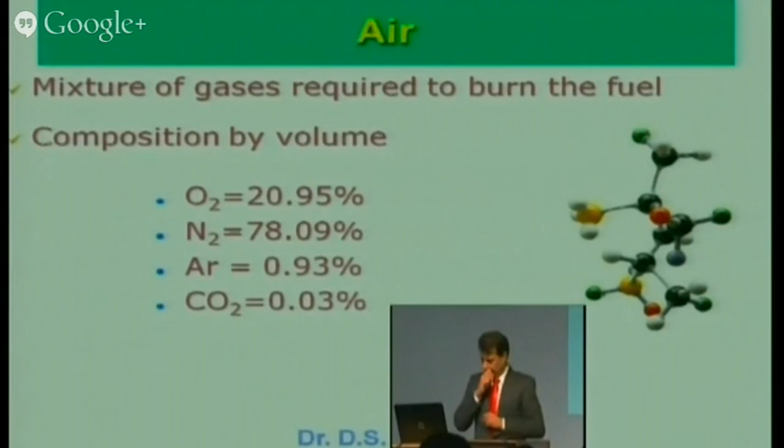And this air combined with the hydrocarbon, we have to understand whether it is petrol, either it is diesel, either it is CNG. CNG is very easy, a very simple gas. The composition is like 80% methane, and methane, if I go by the chemical formula, it is CH4. It means any fuel, either petrol, diesel, biodiesel, LPG, or CNG, is a composition of hydrocarbons, meaning carbon and hydrogen atoms.

And what we are taking also, carbohydrate. When these carbohydrates are burning, they are bound to produce CO2. Similarly, as I exhale, if I take the composition, CO2 is more. Similarly, when the engine is giving the exhaust gases, there is CO2 in that. But CO2 will be there if complete combustion has taken place. If there is incomplete combustion, then there may be CO formation also, and there may be unburnt hydrocarbons also. That we will discuss in the subsequent slides.

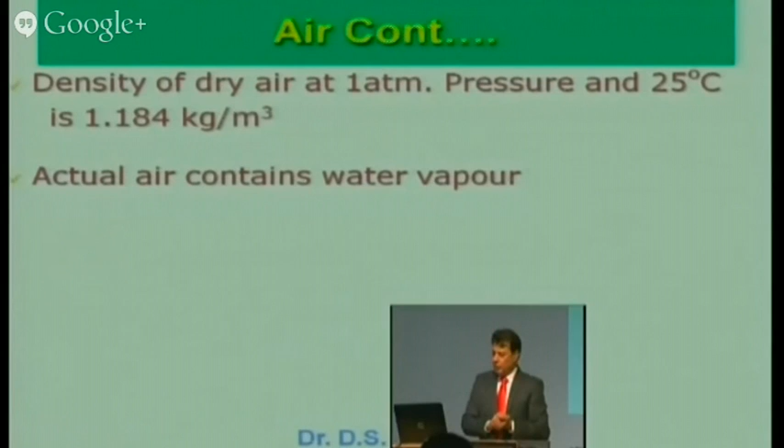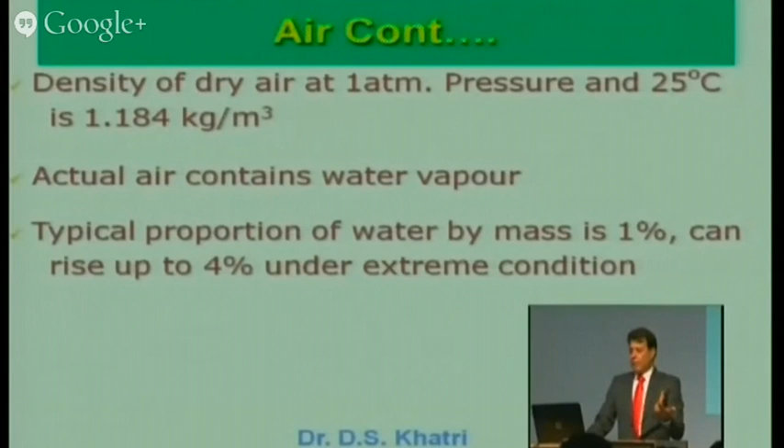So density we are using around 1.18 kilogram per cubic meter. Some vapors are also there, but those at this moment we are not considering.

Now next what is there? Air is fundamental. Next we are talking about hydrocarbons and we call it fuel. So any fuel, any substance, any chemical composition which can be converted from its chemical energy into heat energy, we can use as fuel. Do you know the first engine which was tried used coal?

Not steam engine, even in compression ignition engines, the coal was powdered very finely and that was injected into the engine. Because at that time petrol and diesel were not known. And if you go back, earlier we were using solid fuels.

There are three categories of fuels: solid fuels, that is coal and wood. Then we felt it is giving a lot of smoke, lot of pollution and lot of waste, because when you burn coal, there is a lot of ash.

Then they thought how we can clean the environment, and then came liquid fuels: petrol, diesel, kerosene. These are the category of liquid fuel. Definitely, as compared to wood and coal, liquid burning is more clean.

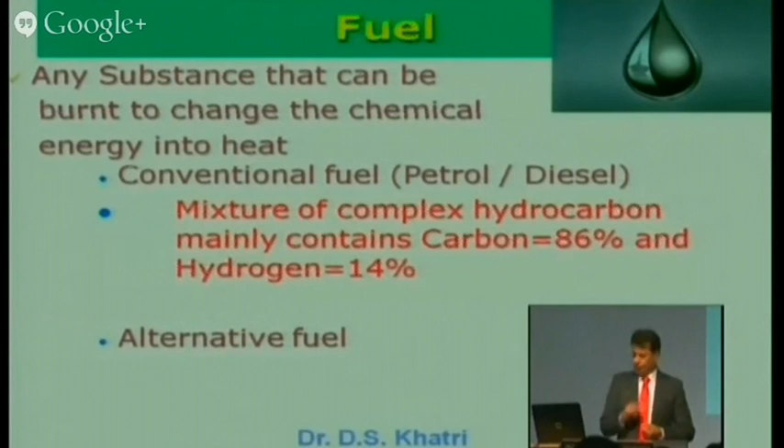But to reduce pollution, to clean the environment, some unconventional fuels are also being used, and one of those is CNG, compressed natural gas. The chemical composition of CNG is more than 80% methane, CH4.

Now, very important aspect. If you want to be healthy, if you want to optimize yourself properly, suppose every day you are taking 3 chapati and some salad, and if I ask you to take 10 chapati, will you get more power? No.

Even your system may have some problem. You may get some problem. If I ask you to take half a chapati, again you may have some problem. The important aspect in engineering, and even in human health, is what is the appropriate quantity which you should take. It is easy to take less, it is easy to take more, but the appropriate quantity is hard because you don't know what is appropriate.

Similarly, air fuel ratio will tell you, for a given amount of air, how much fuel is required. If you give less than that, it may cause a problem, and we have to understand what type of problem it will cause. If you give more, again it will cause a problem. Like in a human body, if I am taking too much food, I have a problem. If I am taking too little food, again it may be a problem. So appropriate quantity, appropriate food, appropriate fuel is a design parameter which is very basic to get the maximum output from the engine, maximum output from your body, maximum efficiency of your body, maximum efficiency from the engine, with minimum pollution.

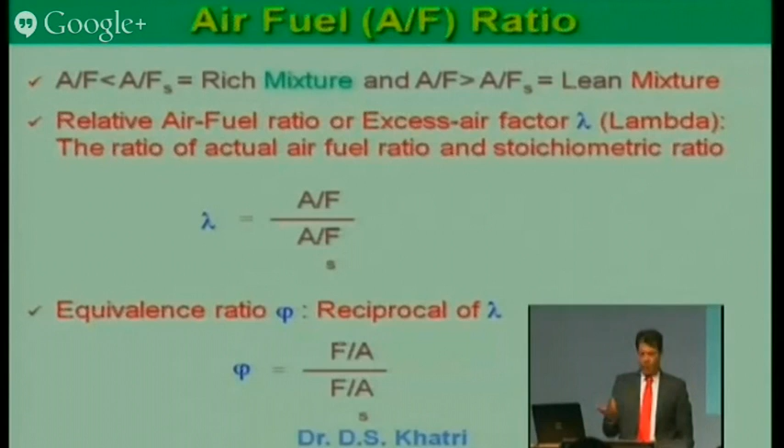The lambda value may be 1.1, say 1.01, or whatever it may be. And if the actual air fuel ratio is less, it needs 14.7 but it is 13, so it will be 13 divided by 14.7, which will be less than 1. So either the value will be more than 1, or less than 1, or equal to 1. If it is 1, we call it stoichiometric. And 1 by lambda is equal to equivalence ratio, which is the reciprocal of lambda. We call it fuel air ratio divided by fuel air ratio, but anyone will do for you.

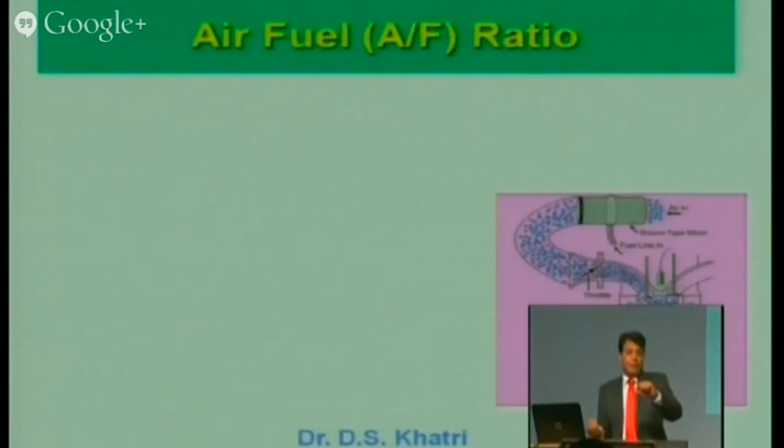Now all struggle is going on how to control the air and fuel ratio. This is one aspect of the mixture preparation. Suppose I am taking 50 cc of air, how much fuel do I give? If I am to give 3 cc of fuel, how do I give exactly 3 cc - neither 3.1 nor 2.9? How to make sure, especially because the engine is varying in speed and load conditions? As the condition changes, I have to change the quantity of fuel also, because air will change. In running condition, air is going high, low, high, low, and the fuel has to match with that requirement. If I am able to do this with 100% efficiency, it will be good. If I am not able to do it, your fuel economy will be poor, your pollution will be more, and waste of energy will be more.

So now I think three things are clear: stoichiometric air fuel ratio, where lambda is 1; rich air fuel ratio, where lambda is less than 1; and lean, where it is more than 1.

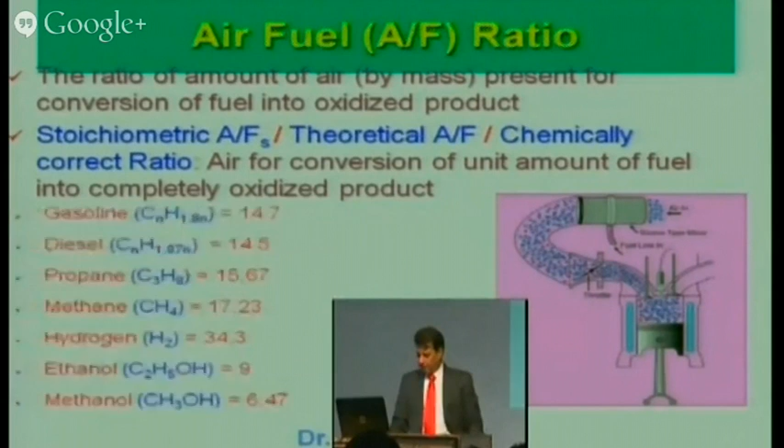Now I am giving some air fuel ratios of different fuels here. For petrol, it is around 14.7. For diesel, it is 14.5. For propane, it is 15.6. For methane, that is CNG, it is 17.2.

For hydrogen, a wonderful fuel - why is it wonderful? It does not have a carbon content, only hydrogen, so you will not produce CO2. There is no carbon, so that is a fuel of the future. Even in aircraft, you are using some of this concept, but that can be used only up to a certain level. For oxidation you need oxygen, but where is the oxygen? So either there is a carrier of oxygen in a cylinder we have to carry - one cylinder of hydrogen, one cylinder of oxygen, because air is not available there - this is for space application.

Secondly, hydrogen has a very high calorific value - it is 3 times more than petrol and diesel. 1 kg of hydrogen has around 120 megajoules of energy, whereas 1 kg of petrol has only 42 megajoules of energy. So energy content is more. We are also using ethanol and methanol.

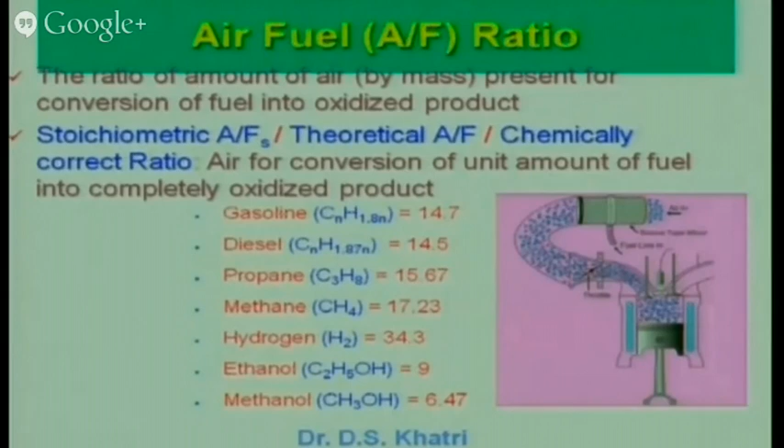Now why is it so important? We should understand why it is so important to control the air fuel ratio - why are we talking about this so much? If it is lean, what happens? What happens if it is rich? What happens if it is stoichiometric? I should know and understand that.

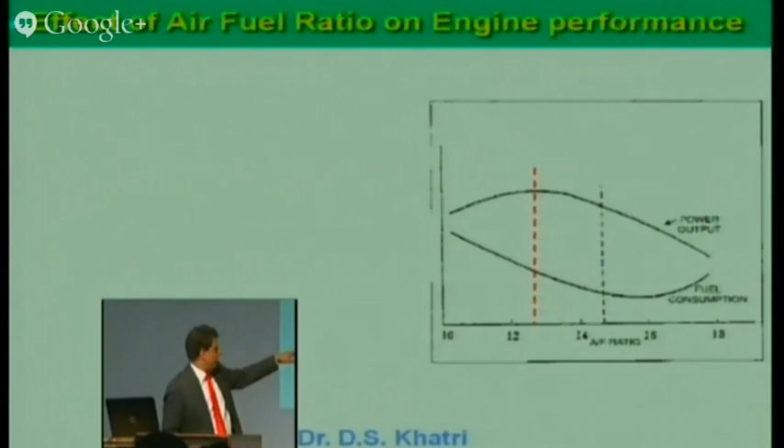Now these are two curves. One is indicating the power output of the engine - the upper curve is power output, and the bottom curve gives the specific fuel consumption. If you look at where the maximum power is, around 12.4, it means the mixture is rich there. If I use the same mixture, my fuel consumption is higher, but I want fuel consumption to be low. If I make it lean, at stoichiometric air fuel ratio around 14.7, the fuel consumption reduces, but it is not at the minimum level. Minimum fuel consumption I get around 16:1.

But if I use 16:1, I get very good fuel economy, but I am not getting the power - and that is a challenge. That's why the engine management system comes into picture to manage all this. Now I have shown you one slide only about power and fuel consumption. What about emissions? Emissions is also a challenging task - I have to reduce the emissions also. Now we can see the effect on emissions also.

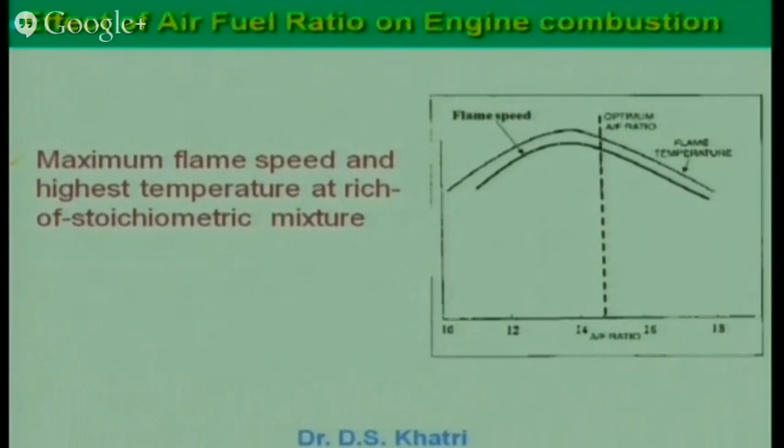To understand the emissions, let me make clear the fundamentals of combustion. Why am I trying to get the stoichiometric ratio, what happens? Because ultimately I am burning the fuel - what happens to the burning rate? The dark line, bottom line, is the flame speed - the flame produced in the petrol with which combustion can take place. Maximum flame speed is around a rich mixture, meaning petrol can burn very quickly when the mixture is slightly rich.

If you make it 10, that's not good. If you make it 18, that's also not good from a combustion point of view. So flame speed is maximum around 13.8 air fuel ratio - there your combustion is very fast. It's like taking some tonic - 10% tonic will do, but if you take 50% tonic, it will not do. So with the engine also, a little tonic, a little extra fuel, will make your combustion better and make your power better. Clear?

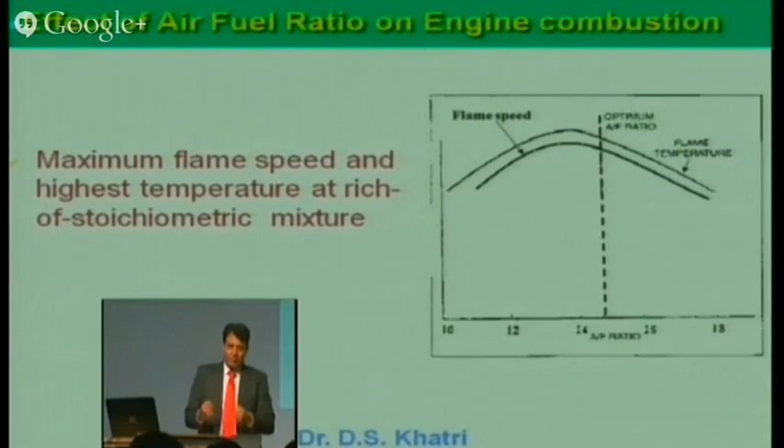Now, this is all three. What is the challenge to me? If I want to get very good combustion, I need a different air fuel ratio. If I want maximum power, I need a different air fuel ratio. If I want maximum fuel economy, I need a different air fuel ratio, and they are contradicting each other. So as an engineer, as a scientist, as a technical expert, what should I do? Whether I should operate at the upper one, middle one, or lower one.

That is a challenge. Now we have made clear the basic three things. Let's come to the emissions. There are CO, HC, and NOx emissions. Now if you look at the NOx emission, NOx is maximum, it is a bell shape. NOx is maximum when lambda is 1, or air fuel ratio is 14:1, 14.7.

If I am operating very close to stoichiometric, NOx emission will be very high. That is a problem. For hydrocarbon, if you see, as I make the mixture rich, hydrocarbon emissions go up. If I am making it lean also, again it goes up. So to reduce hydrocarbon emissions, I have to operate around 14.8 or 14.9. But if I am operating there, NOx is maximum.

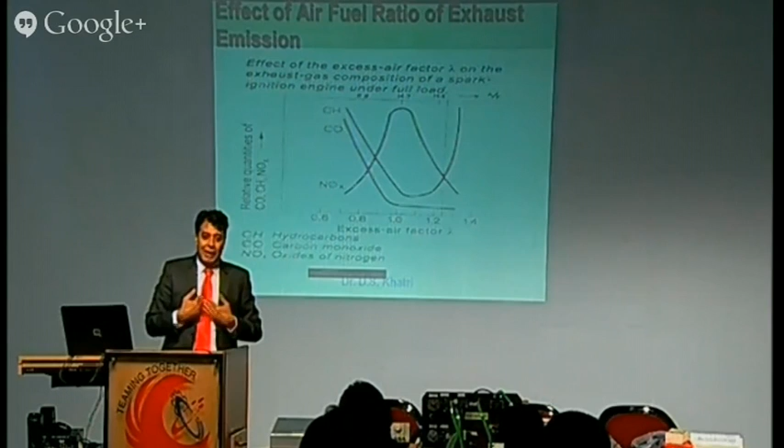What should I do? Because I have to regulate both. Emissions regulations say NOx should be low, and hydrocarbon emissions should also be low.

Let's come to the third, CO emissions. If I am using a rich mixture, CO is very high. So if I want to increase power, hydrocarbon will go up slightly, CO will go up. If I am making it lean, power will reduce, but hydrocarbon will increase, fuel economy will improve, and CO will reduce. So from this trend, lean mixture is good for CO reduction.

Why it is good, we will cover tomorrow in the combustion study. To reduce hydrocarbon emissions, I can operate the engine very close to stoichiometric, around 14.7, 15, in that range. But there, NOx is very high.

If I want to reduce NOx, either I can operate rich or lean. So it means for CO it is a different issue, for HC it is a different air fuel ratio requirement, and for NOx it is different. Now I have 5 or 6 parameters. I want power, I want fuel economy. Air fuel ratio requirement for power is different, for fuel economy is different, for CO it is different, for hydrocarbon it is different, and for NOx it is different. So there are 5 things which I have to control, and all 5 require a different air fuel ratio. So how to manage all these things?

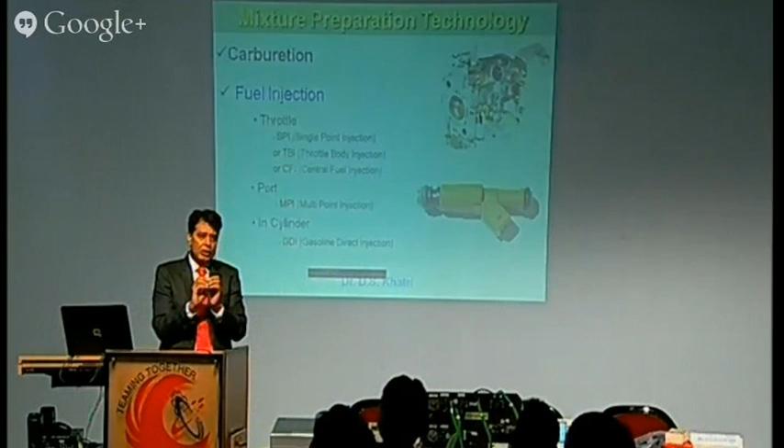So we are going to talk about this in this series. Earlier, to meet the air fuel ratio requirement, we were using a carburetor. You know carburetor? The first engine, when it was designed in 1900, used the carburetor. Since then, there were a lot of modifications done in the carburetor. If air is 1 kilogram, how much fuel is to be given, that was controlled by the carburetor. So carburetor is a device which was metering the air and mixing the appropriate quantity of fuel into the air.

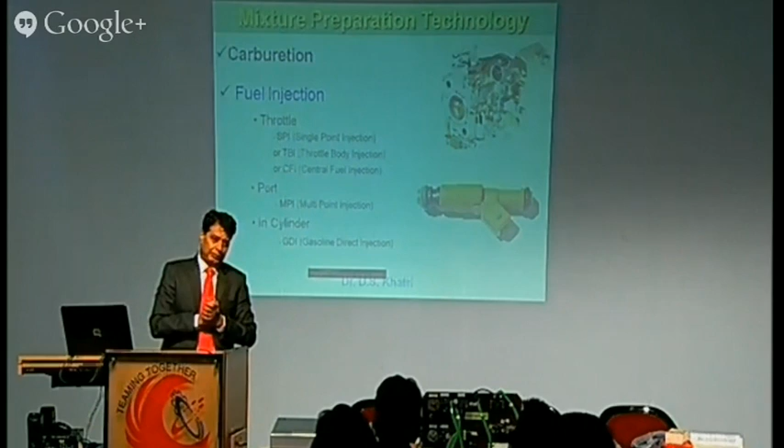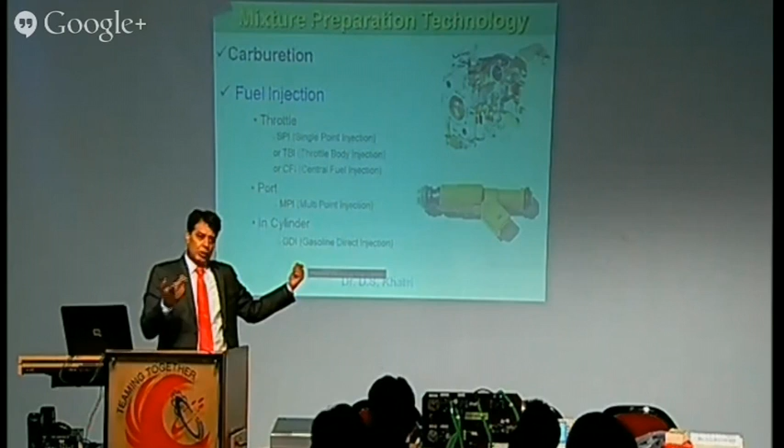Even today, most motorcycle engines work with a carburetor. But today no car uses a carburetor. Carburetor became obsolete in 2000 because it was not able to meet the emissions. It was not able to reduce emissions beyond Euro 2. Up to Euro 1 it was good, it could meet Euro 1 or Bharat Stage 1. But then they said, reduce CO further, reduce HC further, reduce NOx further, and the carburetor was not able to meet that. Why was it not able to do this? Because the carburetor was not able to control the air fuel ratio very accurately or precisely. And hence a system like electronic fuel injection was introduced.

And today we will talk about this system.

In fuel injection system, there are different types of options available. We have single point injection system where we use only one injector. We have throttle body injection system, where we are injecting in the throttle body itself. We are using central fuel injection, CFI. We are using port MPI, multi-point injection system. Suppose there is a 3-cylinder engine, so in every cylinder we are using one injector to inject the fuel.

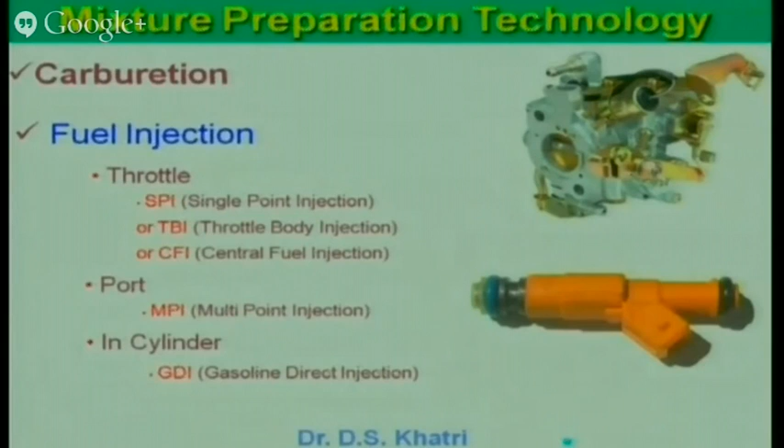Then GDI, it is a new concept. In India, there is no car which is using GDI, but some cars have tried it. It is a gasoline direct injection system. Here the injector is mounted directly into the combustion chamber.

It is more complicated, and we will touch upon this, but today our focus will be to understand the fundamentals of mixture preparation. One part is carburetion. I gave you a little background on what a carburetor is, and why the carburetor is obsoleted and why we introduced fuel injection technology.

Just because it is history, we should know our parents', our grandparents' names. It is like that. So in technology also we should know what was there and how it was improved.

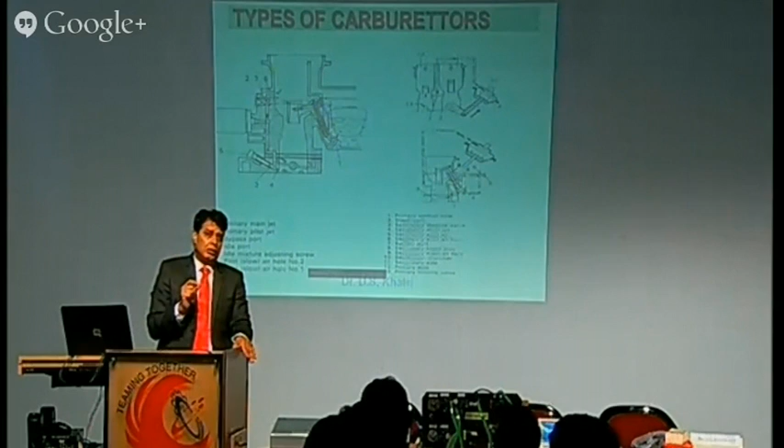Earlier we were using a single barrel carburetor. There was one passage only from where air was coming and fuel was injected there. The problem is the engine is working, or is bound to work, under a wide range of speed and load.

When you start the engine, it is known as idling. It is running at 900 RPM. When you accelerate, put first gear, you are accelerating maybe to 1200, maybe 2000. Change the gear. If you are on the highway running at 90 km/h speed, the engine speed may be 4000 RPM. Load is varying, engine speed is varying. So that one barrel only was not able to meet the varying requirement of the engine's air and fuel.

Then they thought we can use a double barrel. Like this, two ports have been added. That gives a little better performance, but again it was not optimized.

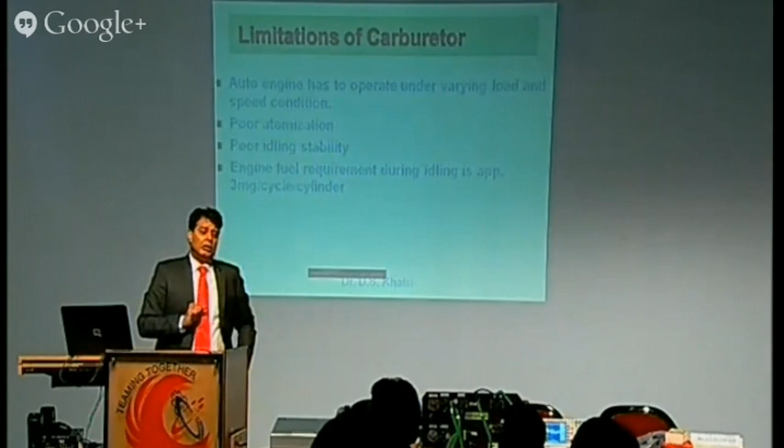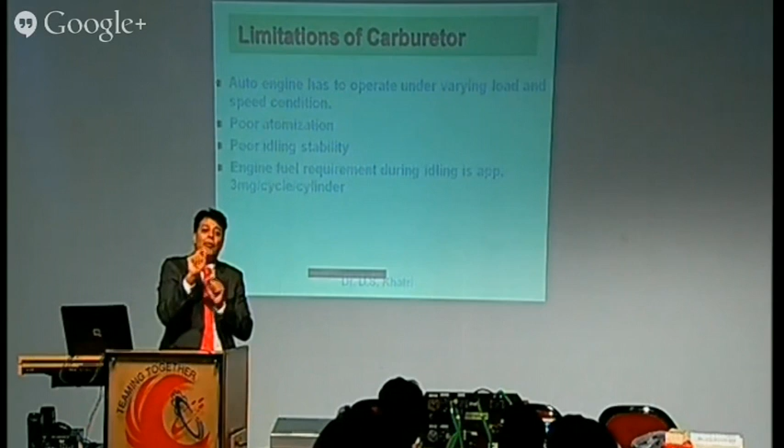Why was it not able to meet the requirement? Because there is a fixed jet which is giving the petrol. The fixed jet can give a fixed amount of fuel at that particular speed. It cannot vary. The jet size is fixed once you put it in the carburetor. The jet size may be 1 mm, or 1.2 mm. That may be good at 2000 RPM, but that may not be good at 4000 RPM. So I cannot meet the requirement under all conditions.

Now second, more important thing is when you start the engine in the morning, because carburetor is using a pressure delta P - the difference between atmospheric pressure and the pressure in the carburetor at the throttle, where this venturi is. Here pressure drops and fuel comes from this to the venturi.

Here the pressure difference delta P is very low. So when you are starting the engine, the fuel atomization is poor, because the fuel is liquid here. When it is coming here, it is coming in drops. If the drop is very fine, very fine in diameter, it will mix in the air very well.

Like if you have a big cube of sugar, it is difficult to mix in the milk or water. But if you have very fine powder, you can mix it quickly.

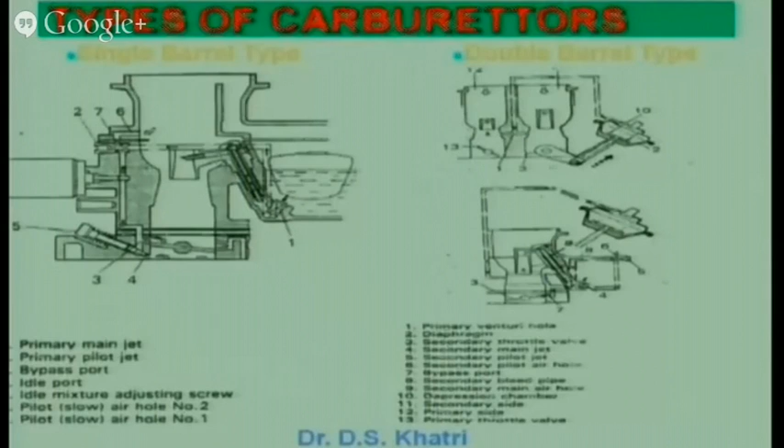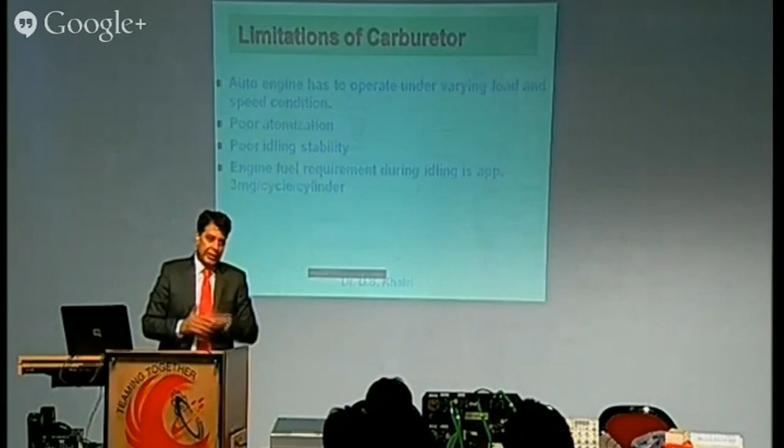So this problem is more prone at low speed. At high speed, the speed is very high, so if you mix, it can mix up. But at low speed, it is not mixing. So that was one problem with the carburetor - poor atomization, we can call it technically. Due to poor atomization, idling was unstable.

Engine, suppose you want to fix 900 RPM, so sometimes it is going 950, sometimes 850, sometimes 1000. You are not changing anything, but still the engine is changing its speed because of this behavior, which is not good from a fuel economy point of view, neither is it good for efficiency, nor from an emissions point of view.

Now another important thing - I am giving a figure per cycle per cylinder. Typical 800cc, like this is the example of a Maruti 800cc car or Alto 800cc, that needs only 3 milligram of fuel per cycle per cylinder. To meter 3 milligram, it becomes 2.9 or 3.1.

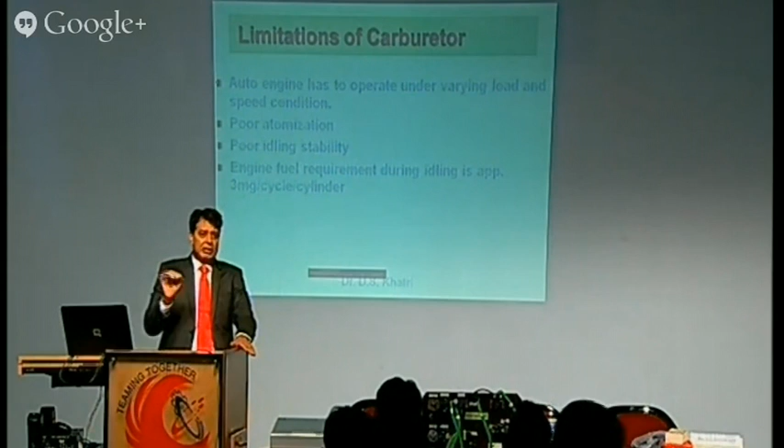Your stoichiometric equation has changed. Your air fuel ratio has changed drastically. So I have calculated, okay, I have a carburetor, please give me 3 milligram. But the carburetor sometimes gives 2.8, sometimes gives 3.2, sometimes it may give 3 also, but it is not giving a constant amount. So my efficiency, my pollution is going in a different direction.

Carburetor works on a speed-up basis. If speed is increasing, more air is coming in, and more fuel will come, which is met by the carburetor. But the problem is that the size of the jet is the same, so it may increase, but it may not increase appropriately, as required by the engine. That is the problem, there is a little bit of lag in that.

Now another thing, if there is one carburetor and I have a 3-cylinder engine, the same fuel is going through the intake manifold, so we call it mixture distribution. The fuel going through, because the carburetor is in the center, and there are 3 cylinders - one here, one here, one here - the fuel travels to each. In the center it has a shorter path, and for the others a longer path. Even if you give the same quantity of fuel, when reaching the combustion chamber it may be different because the traveling distance is different. It may also stick on the walls of the intake manifold. So mixture distribution is not uniform.

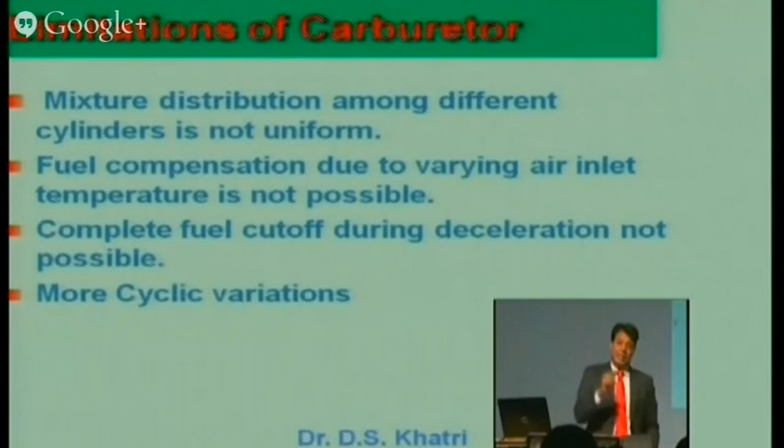But I don't need fuel at that time. It may be possible I am applying the brake also, but fuel is still going. So this concept is known as fuel cut-off - since I don't need fuel, I say cut off the fuel supply during this period from the carburetor. That is very difficult and even not precisely possible, that is again a limitation of the carburetor. In an injection system I can do it, because I will give the command to the ECU, I will develop a control strategy - when deceleration is there, you cut off the fuel, I cut off the injector. There is no supply to the injector, so the injector will close, it will not open, no supply. And I can even make a strategy for when I need the fuel again - suppose I need it at 30 km/h speed, again I want to accelerate, it will start automatically.

So I think now you are better acquainted with why the air-fuel ratio has a significant impact on power, fuel consumption, and engine combustion characteristics like flame speed, flame temperature, combustion pressures, and emissions. So with this you can realize there is a need to control the air-fuel ratio very accurately, very precisely.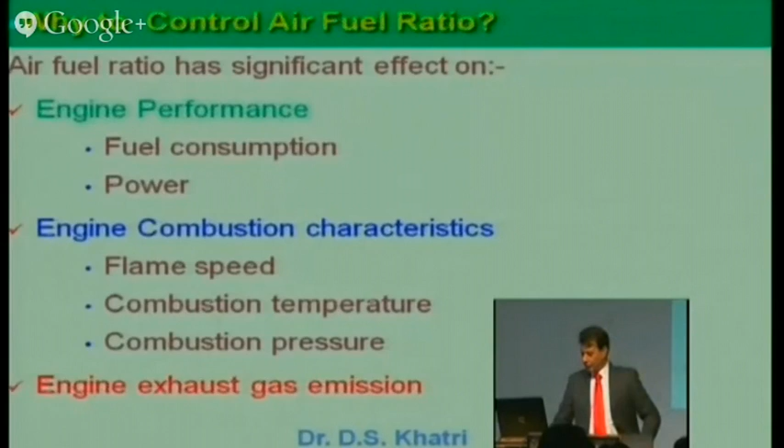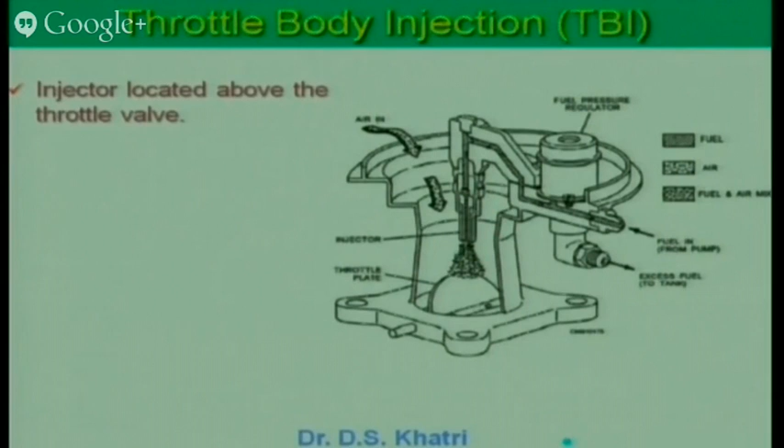This is a very simple throttle body injection system. In this there is a throttle body, and instead of a carburetor I am using an injector. This injector is mounted in the central part of the throttle body, where you can see the spray taking place in the throttle body itself. So the injector is located just above the throttle valve in the throttle body. This system operates at low pressure, around 1 bar, therefore fuel metering is at lower cost due to an inexpensive fuel pump - actually in this system we don't require a fuel pump. The pressure difference is what I have used - instead of that jet, I have replaced it with an injector, which is controlled by the current.

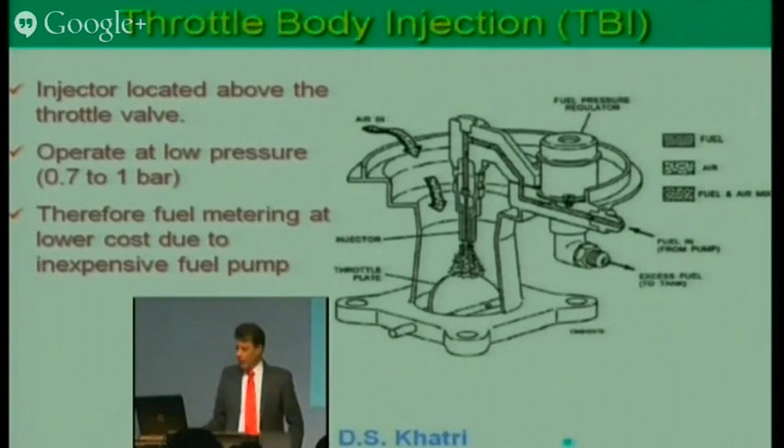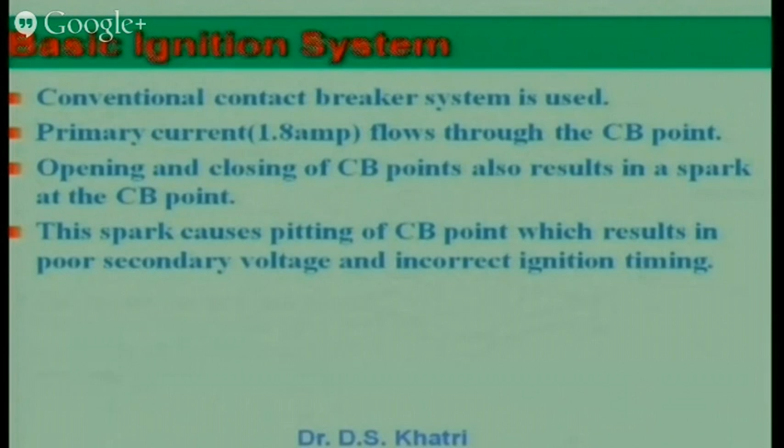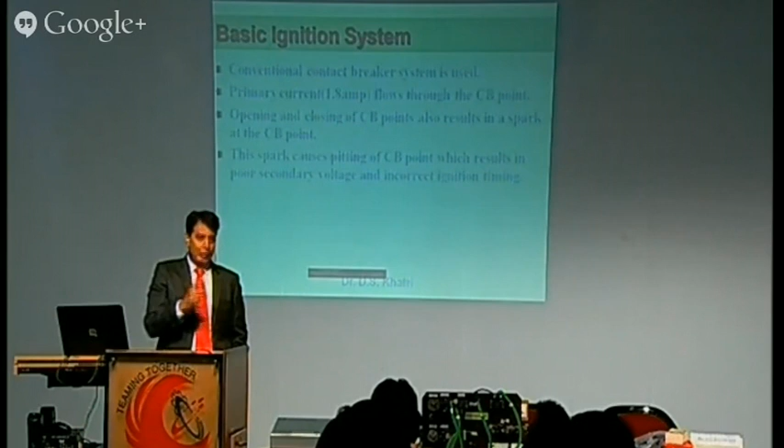Now we have covered one part, fuel. Now, only if I am giving the fuel, how to start the combustion, that is another part. It means I have to create a spark at the appropriate time. How to do that, when to do that, what should be the duration, and what should be the energy of the spark so that it can create the combustion.

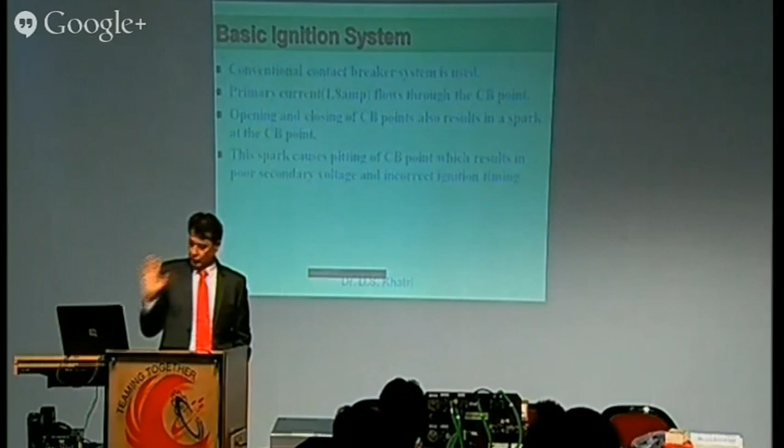Earlier the system, what we call the contact breaker type, there the limitation is that we have the mechanical breaker point and the current is passing through that. There was an ignition coil. When it is opening, the secondary voltage is produced, that is around 15,000 volts, because the ignition coil is like a transformer. There is a primary winding and a secondary winding, but that interruption is done by the mechanical breaker point. That's why if you go for tuning, they set the mechanical point, and when it is opening, a little spark is created.

So to avoid that damage, we are limited. We cannot increase the primary current. Hence our secondary voltage produced is always not what we want, it is less. So that was the limitation of the mechanical type of basic ignition system.

And to burn the fuel properly and completely, we need an appropriate amount of ignition energy. Secondly, that mechanical point, after 10,000 to 20,000 km of running, pitting starts and the performance further reduces. So the secondary voltage production is reduced, the output is not sustainable or stable over the period of time. That was the problem of the ignition system.

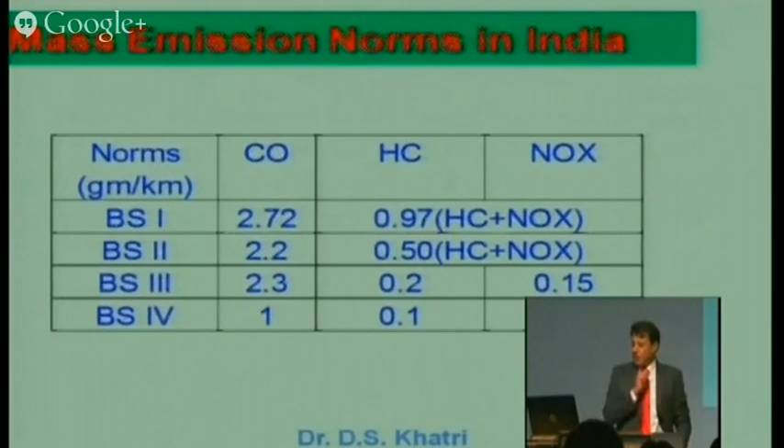Now why all this has been done - if you look at emissions, just to give a background: Bharat stage 1, we call it BS1 or Euro 1, CO was 2.72 gram per kilometer. Euro 2 was reduced to 2.2, and in BS4 it is 1. Similarly, HC is reduced and NOx is also reduced. So this pressure on emissions reduction, a carburetor cannot handle. That's why we need the engine management system.

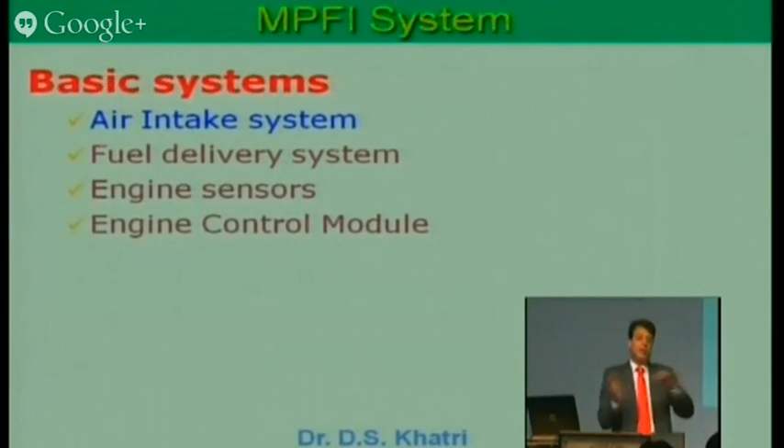Now I will start the engine management system. This system can be categorized into 4 parts: air intake system, where air is coming; fuel delivery system, where fuel is coming; different sensors; and the engine control module, that is the ECU. Now look at the air intake system.

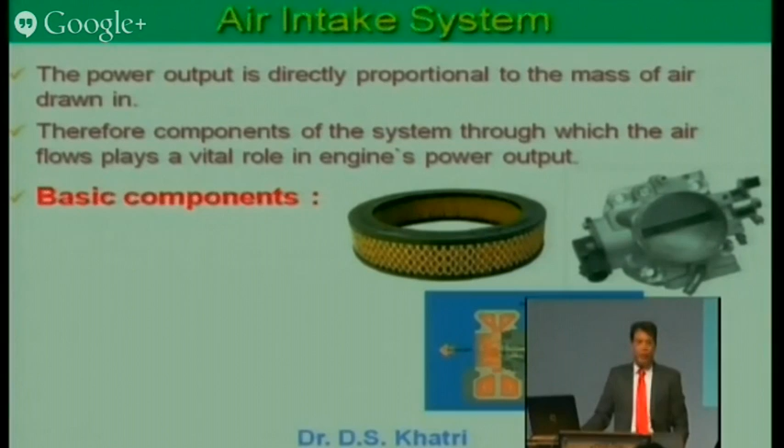You can understand it is like a nose, I am inhaling from here. Even in our nose, there is a filter system working, which will hold all the dust of the air - there are small fibers inside the nose that remove that dust. Here we are using an air cleaner, which cleans the air before going to the engine, so we call it an air filter. Then from the air filter, the air passes through the throttle body.

And if the engine is supercharged or turbocharged, then it will pass through that also, otherwise it is going directly to the engine. So the intake system comprises the air filter and throttle body.

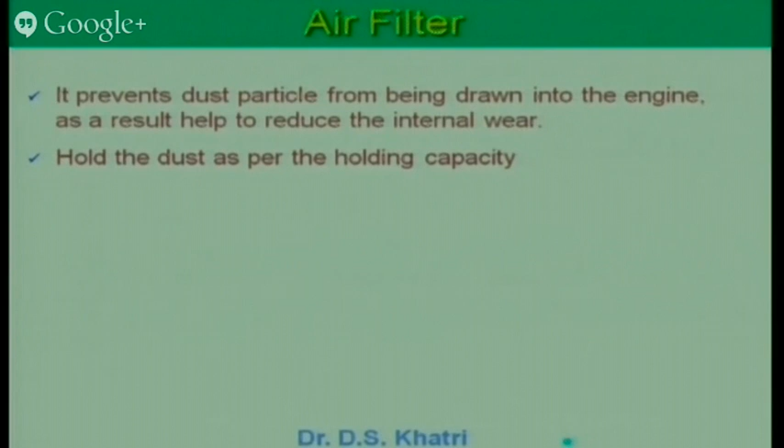Now why do we want to use an air filter? So that if dirty air goes in, it will damage the engine - the wear and tear will be very high and the engine will seize. It will also damp the noise - if you remove the air cleaner, noise will increase. That is another benefit.

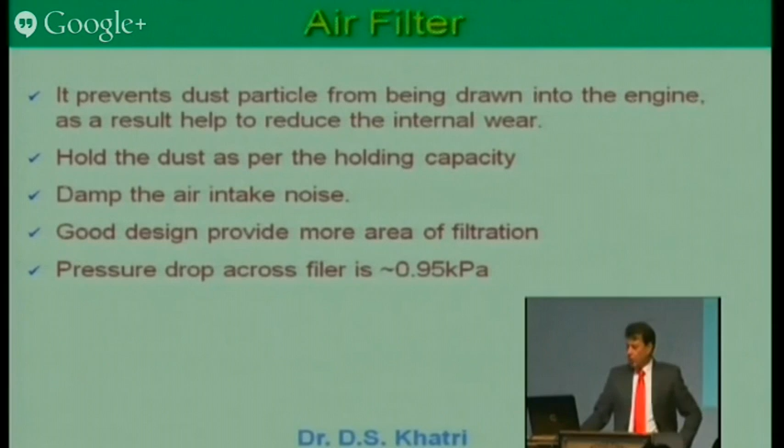But if I am using an air cleaner, I have to clean it after some time because dirt will be there. So when should I clean it, how much dust it can hold - that is a design parameter we call dust holding capacity, how much dust it can absorb. In a new filter, the pressure drop - because whenever we put any filter there will be a pressure drop across it - is around 1 kilopascal. And filtration efficiency is generally kept more than 98%, so most of the dirt should be removed.

Now there are different types of designs: side mounted, central mounted, paper type of filter - we use filter papers to clean the air. And you have seen some oil bath type filters also. Oil bath type filters are used in buses and trucks where the dirt amount is very high, and in tractors also. Paper type filters are used in motorcycles and passenger cars.

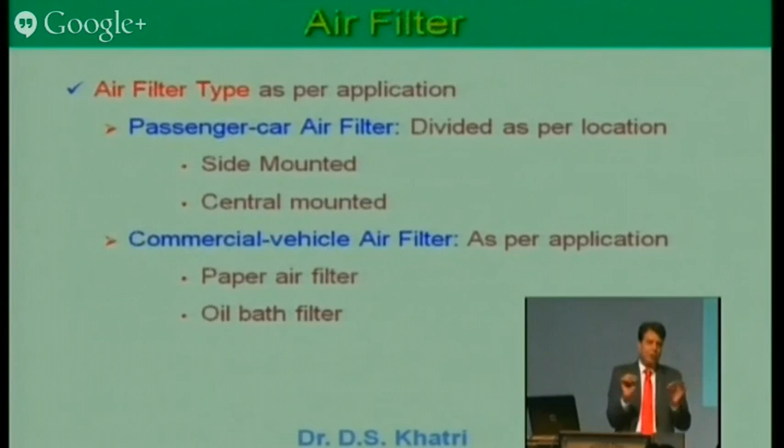Now come to the throttle body. The throttle body actually controls the amount of air. Your accelerator pedal, when you are accelerating, the amount of air is controlled by the throttle. You can see that valve. Air is coming from the air cleaner side, then it is going to the engine. So this is the valve.

When it opens, more air is allowed. Generally, from your interest point of view, these throttle bodies are made of either aluminium or plastics. So it controls the amount of air.

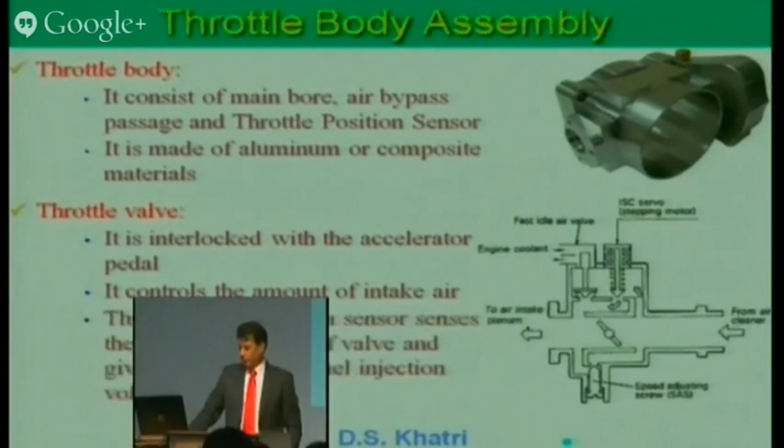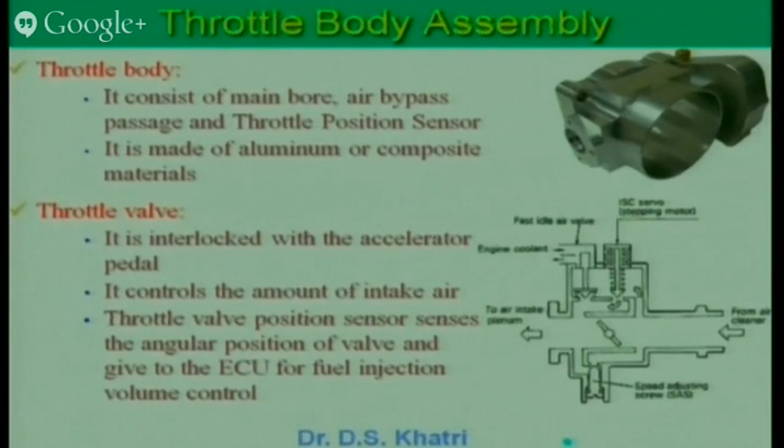On the throttle body, we are mounting the throttle position sensor, which indicates how much the throttle is opened, and it gives that as an input to the ECU. We call it the throttle position sensor.

Now, a very interesting thing. Suppose your car is idling and you have switched on the AC. When you switch on the AC, you are not pressing the pedal, but the load increases. So when load increases, who provides extra air and extra fuel? For that, we put an idle air control valve, which is integrated in the throttle body only, or sometimes it is separate. So whenever there is extra load during idling, that is taken care of by the idle air control system.

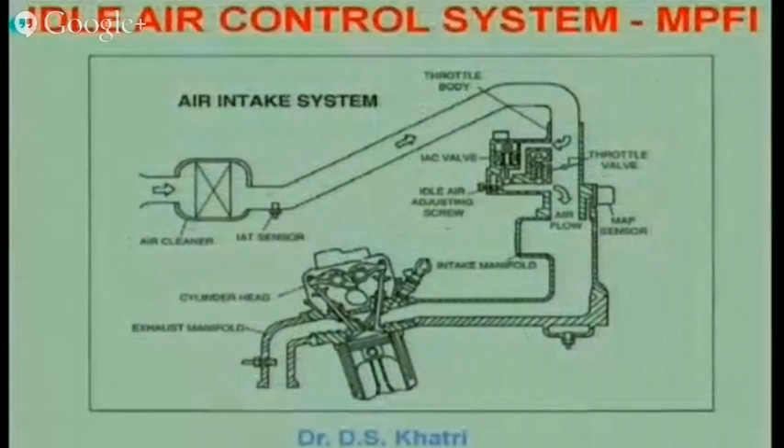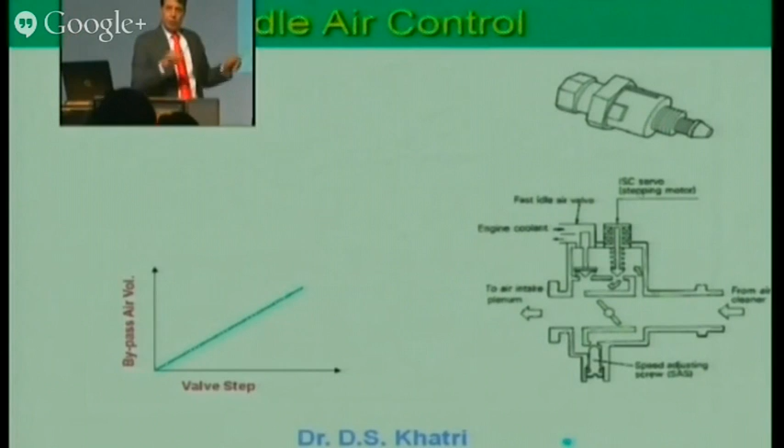This is the idle control valve. So you need more air during idling. In this condition, the throttle is constant, so there is a bypass. If you can see, there is a bypass. The valve will open and allow more or less air from the bypass. This system works through electronics, through the ECU, and that strategy, we have to develop - when to open, how much to open.

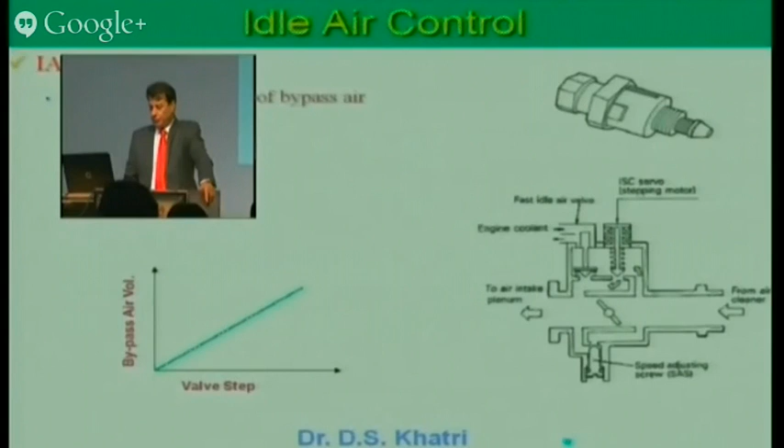For this we can use two types of systems. Either a stepper motor - I give it current, it will open more and more steps - or there is a flap type valve that can also be used. Different companies use different types of valves.

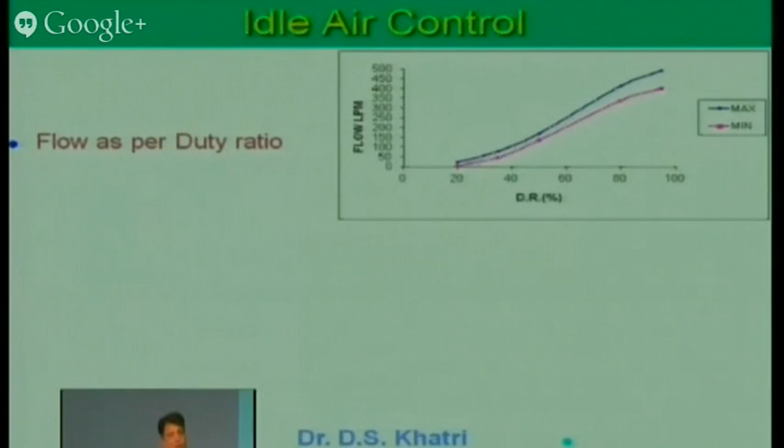This is the duty ratio - how much airflow is required, that is the duty ratio of this idle air control valve. If it opens more, we call it more duty ratio. If the capacity is 100% and it is working at 100% capacity, duty ratio is 100. If it is completely closed, 0 duty ratio. If it is 10%, it means 10% utilization. So it depends how much the engine requires - I may open it 10%, 20%, 30%, depending upon the need of the engine.

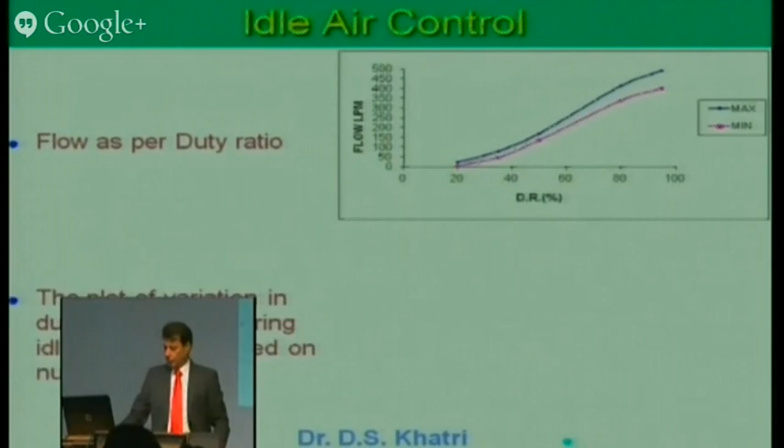Now, the air intake system: so there is an air cleaner, throttle body, and idle speed control valve. Now come to the fuel delivery system.

We have the fuel pump, then we need a fuel filter, like an air filter - we have to clean the fuel. Then we need a fuel pressure regulator, because we want the fuel that goes to the injector to be at constant pressure. If the pressure varies, then the quantity you are injecting will vary.

So here I can give you experimental data. In cars, we use around 2.9 bar of pressure. Like Maruti Alto uses 2.9 kg per centimeter square fuel pressure. So the pressure regulator gives the fuel at a constant pressure of 2.9.

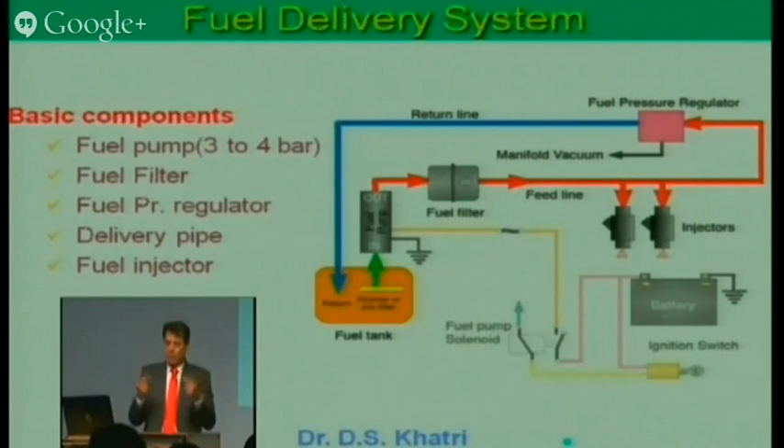So the fuel pump works between 3 to 4 bar, then the pressure is maintained - the fuel filter cleans the fuel, the pressure regulator maintains the pressure of the fuel. Delivery pipe: suppose there are 3 cylinders, I have to mount 3 injectors, so we call that a delivery pipe or fuel rail.

So this is the schematic. Fuel pump - let me explain the fuel pump requirement.

It should be capable of working between -40 to 80 degrees Celsius. Now let me tell you why this is so important. The first car Hyundai launched in India with an injection system was in '99. When this car was launched with the electronic fuel injection system, there were many complaints - the car was standing on the roads, not running. When they analyzed what the problem was, you know what it was?

The problem was - and they were working in Korea, Japan, everywhere - the fuel pump was designed to work at a temperature of maximum up to 50 degrees Celsius. In India, summer is very hot and the temperature of the fuel tank goes above 50 degrees Celsius, because the fuel goes to the engine then comes back as extra fuel. That also increases the heat, and the atmosphere temperature is supposed to be around 46. It means there is no heat exchange, so it will increase further. And if the temperature goes beyond 50, the fuel pump starts malfunctioning - it doesn't work, so fuel doesn't go to the engine and the vehicle stops.

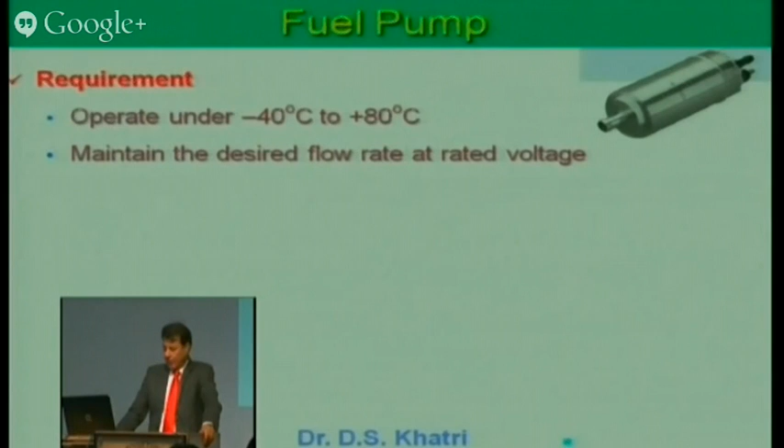Maintain the desired flow rate at rated voltage, and maintain fuel system pressure of 3 to 5 bar.

It should be capable to meet all types of vibrations in the vehicle, because when mounted in the vehicle, the tank is under vibrations. So under vibration it should be capable to deliver.

Now one more important thing I would like to tell you. Do you know where the pump is mounted? Most people, sometimes sitting in a car, might have driven a car. Do you know where this pump is mounted? Inside the...

There, on the engine side, we were mounting the fuel pump of a carbureted system. You are right, the carburetor fuel pumps are mounted near the engine. It is mechanically driven. But this pump is not mounted near the engine.

You see why I am taking this example. This is a very simple thing, right? But sometimes we never think about all these things. We are using a car. Maybe I am a mechanical engineer, an electronic engineer, or even a customer of the car, a user of the car. You know, when we start thinking in a different mode, even thinking is an art. Most people, we don't know how to think.

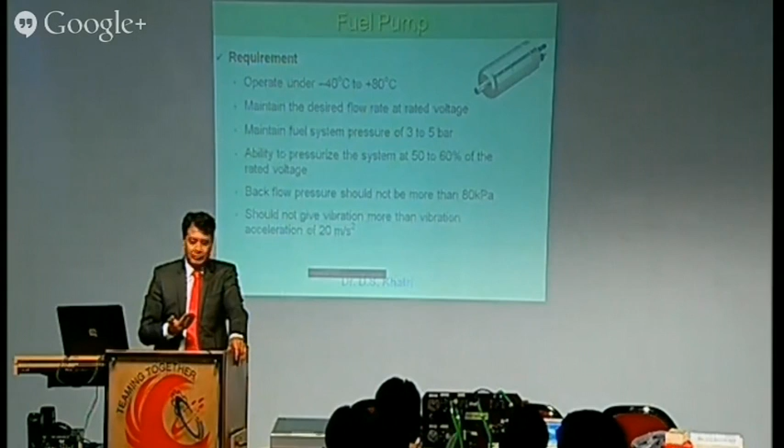So this pump is mounted inside the fuel tank, and there is a very special requirement of this pump. Though the pump is mounted and electrically operated, if any spark is created, it may cause a blast. So one should think, oh, it is very dangerous also.

And suppose, because there will always be some fuel in the fuel tank, it cannot be mounted directly on the floor. There should be some gap, maybe 10 mm or 15 mm, so that it cannot suck the dirt. There is a filter also at the bottom end. If the fuel level is lower than that, the fuel pump is not able to suck that.

That is called dry operation. Even during designing a pump, we have to give the specification. If the car is empty, driver fuel gauge is not working, you don't know how much fuel is, and it stopped running the car. You don't know what is the problem, and suppose there is no fuel. What you will do? You will try to start the car.

When you try to start the car, as you switch on the ignition switch, the pump will work, but there is no fuel. It will start rotating, and at that time spark is created in the armature and rotor, because some fuel is always there in the tank, but the pump is not able to lift that because it is at a very low level.

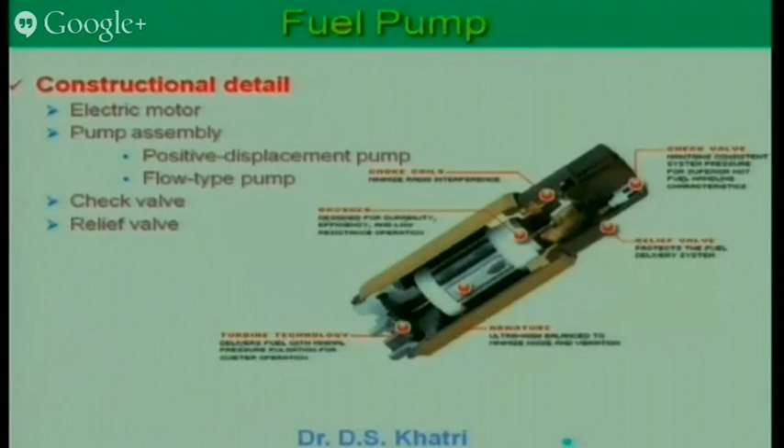This is the internal structure of the pump. It has a motor assembly, and then check valve is there, relief valve is there.

Now coming to the fuel filter, I am just discussing for a few minutes for the fuel filter, but there is a, you can do a lot of PhD on fuel filter. What size of the paper should be there? What should be the pore size? Even a new concept is coming in fuel filter, that is nano fiber.

Now we are using nano fiber to make the fuel filters, where the pressure drop should be minimum. If high quality of fuel you want to make, there should not be any dirt in that, even nanoparticles should not be there. There are plants, there are companies who are working only on fuel filter.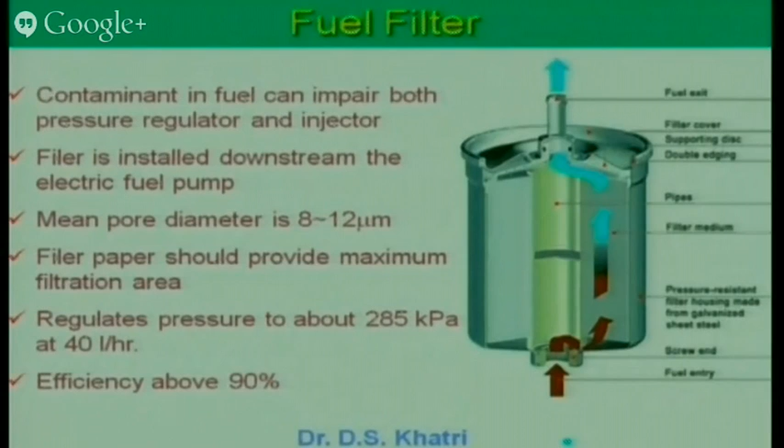So mean pore size is 8 to 12 micron, and flow rate and efficiency of the fuel filter is generally 90%, but now they are demanding more, they say it should be 95, 98. So we have covered fuel filter and fuel pump.

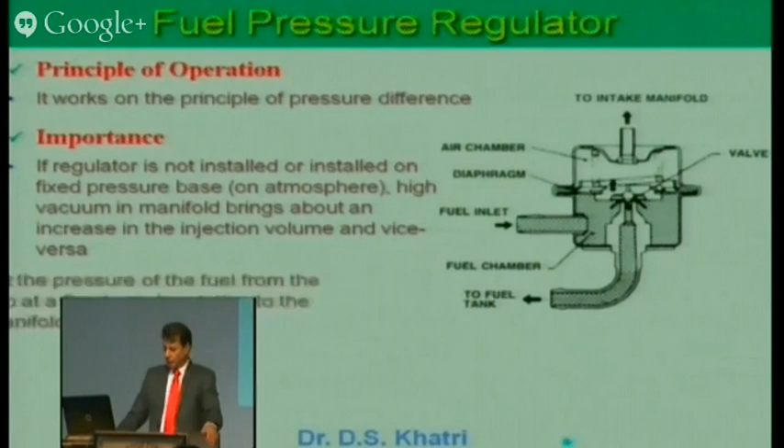Now fuel pressure regulator. Fuel pressure regulator just tries to maintain the pressure at a constant outlet pressure. Even if I want to talk on fuel pressure regulator, I can spend only 1 hour on that alone.

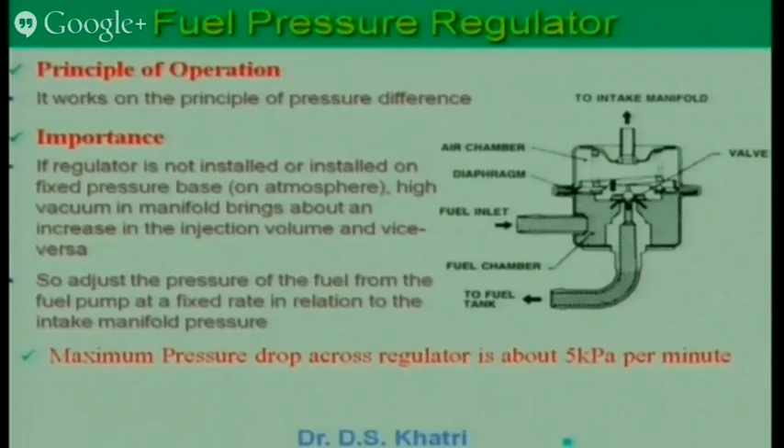But our purpose is to have a look at the total and complete engine management system, so we may not go into the design aspect of each and everything. Delivery pipe, you can see, is a fuel rail where the injectors are mounted. This also, in the demo section, we will show you.

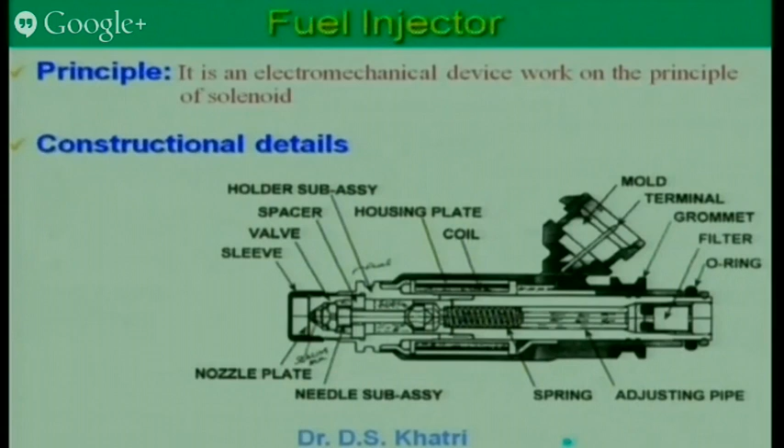Now fuel injector. You will be surprised, in India there is, even as on date, no company who is making the fuel injector. It is such a precise technology and concept. Even no company is making an engine management system. Now this injector making itself is a, all big shots can combine together and try to work on that.

But simply, if I am talking, okay, fuel injector, it is a solenoid valve. When I give the supply, it opens. When I open it, fuel is injected for 3 milliseconds, 4 milliseconds, 10 milliseconds. And when I am not giving the supply, it closes. It means we think, oh, I know the fuel injector, but I know the function of this, the purpose of the injector.

I do not know the design aspect of the injector, or the features of the injectors. The hole which I am making, that is even less than a millimeter.

To make that hole, to make that assembly, this plant is of a company called Denso Japan. They put up the plant, and if you see that plant, you are not allowed to go inside with your bare head, without goggles and without covering your body. Because if even a nanoparticle gets in during assembly, it goes inside the internal structure and may spoil the performance of the injector.

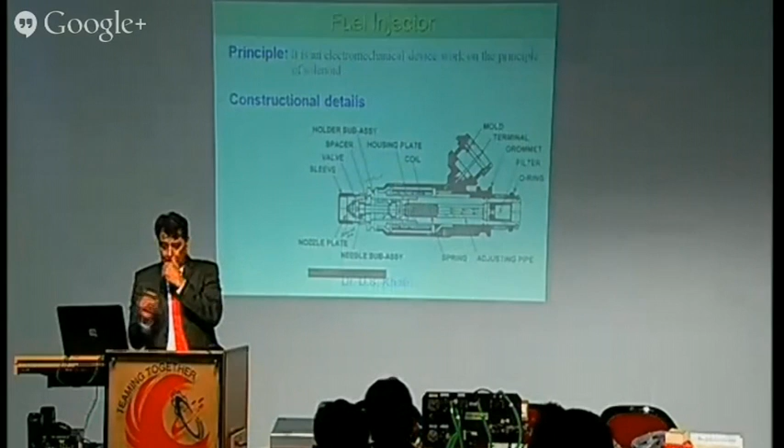So when we talk about this concept, one is knowing the principles, and second is implementing those principles. So even the question - okay, locate the injector in the car - people are looking for where is the injector.

Locate the crank position sensor in the car. I am teaching in the institute that this is a crank position sensor, and if the principle is that the Hall effect sensor is good, what is the Hall effect? You may go through the theory - how it looks, what is the shape, where it is mounted, in which location, in which environment it is working.

When mounting the injector, and talking about the sensors, the gap between the tooth wheel and sensor is very precisely controlled - around 0.8, 0.9, 1.0, 1.1 mm. If there is a change in that gap, your performance may change, and if the gap changes significantly, you may not even get the output signal.

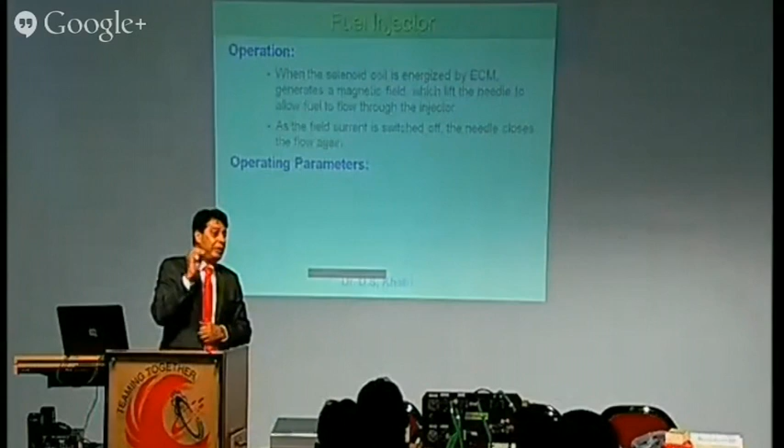Your car will stop because that is the most fundamental signal. If I am changing the tooth profile, how does that affect it? All these things matter. So this is one exercise - I don't know if it's possible in the studio, but sometimes if we can take participants near the car, we can give an exercise: identify and locate each and every component of the engine management system, where it is located and why it is located there. Even identification is one exercise which may take a few hours.

For the fuel injector, the flow rates are very important. We have a test bench to calculate the flow rate and measure the quantity of fuel to be injected in a given time frame. There is also the spray angle - again there is engineering in that, whether it should be 15 degrees, 20 degrees, 30 degrees, or 40 degrees.

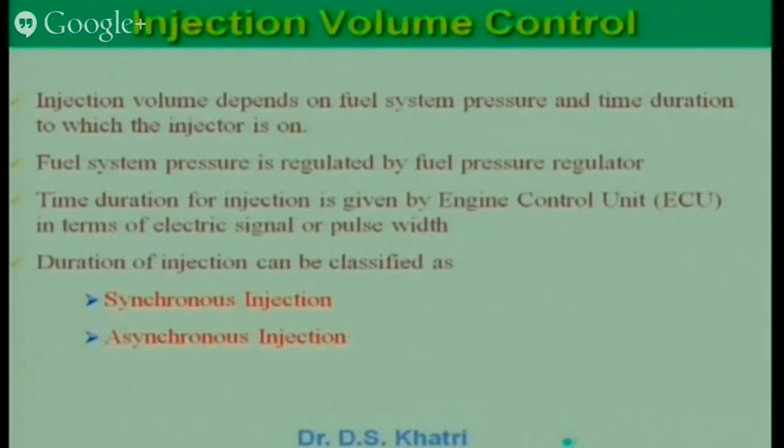Now another point is when I should inject - it could be synchronous injection, asynchronous injection, or timed injection, which we will cover a little bit. When cranking the car, I don't want injection to occur at just one time - I want it to occur 3 times during the intake stroke, tick tick tick, but during running of the car, it should inject only once per stroke.

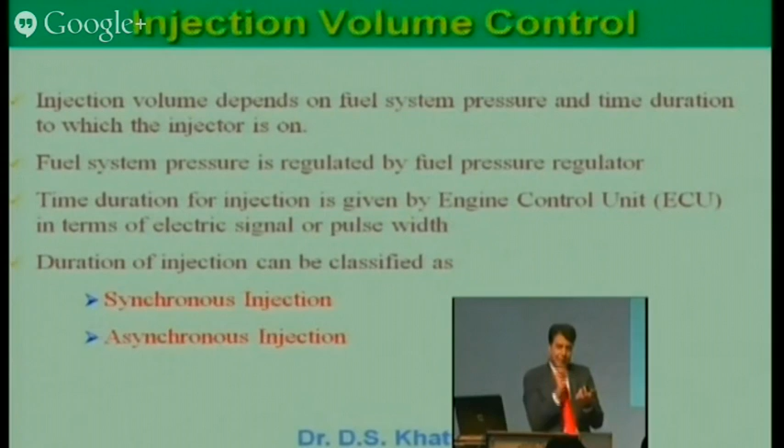So there are different strategies. When temperature is very low, if I inject only one time, the mixture preparation will not be good, so I have to give the dose at certain millisecond intervals. These are the control strategies.

Start injection volume involves two basic things. One is the basic duration of injection, which I have given in a table, but calculated under certain controlled conditions, say at 25 degrees Celsius. When the car is driven, the temperature may be 40 degrees Celsius, so how do we compensate? Or it could be winter, 0 degrees Celsius. Air density will change, and if air density changes, the fuel requirement will change, so we have to add compensation for all these things.

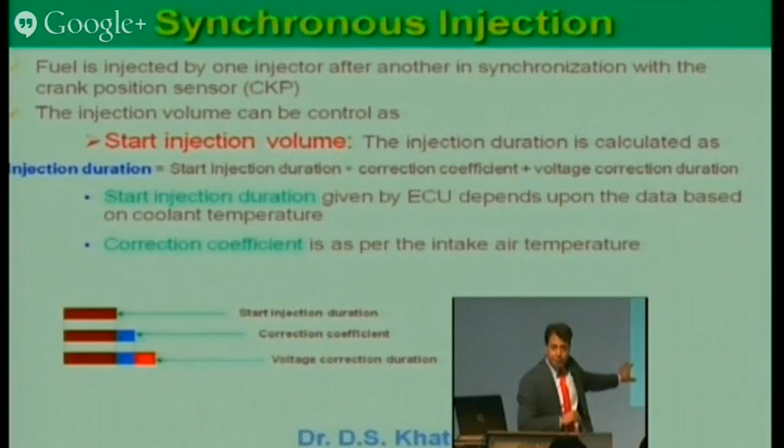First is the basic injection duration, then I have to use the correction coefficient, which is different. This correction coefficient depends upon temperature, cranking, and battery voltage reduction—it's not always 12 volts, it may go down to 10 volts, which affects the electronics. I have to compensate for that, and there may be many correction factors like this. My total injection duration will be basic duration plus correction coefficients due to temperature, battery, humidity, and altitude.

For example, if I am going to Shimla, atmospheric pressure will reduce. How does this affect things? When the car was running at sea level, I gave a duration of injection of 3.5 milliseconds. When I am at Shimla, should I still give 3.5? No, it will not work. If I have gone to Leh, it will not work either. I have to adjust this, so there is an altitude compensation.

Engine management system is such a typical and challenging subject that in the whole world there are only 3 or 4 companies doing this. Not in India, or in this region at all—no one is there. It's from Japan, Germany, USA, and Europe, Italy. There are 4 major companies broadly, because it requires understanding of the engine, sensors, actuators, software, and hardware—all these things are required.

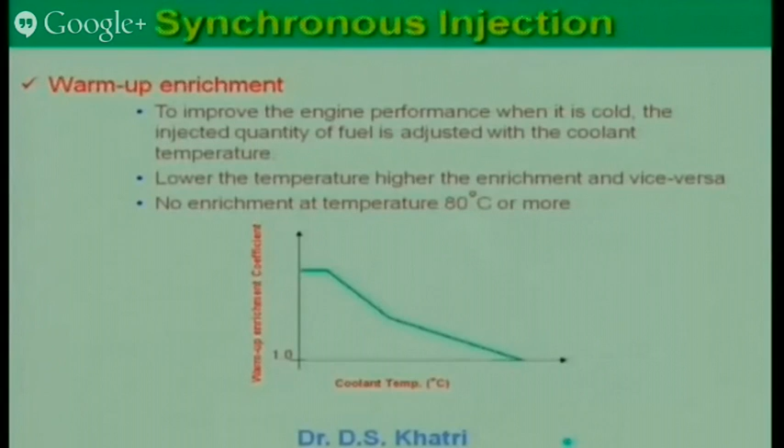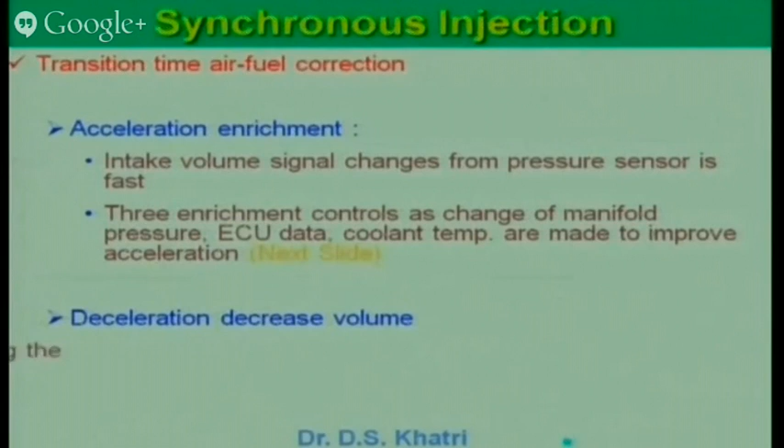This is the temperature correction, transition time air fuel ratio correction, and power enrichment—again the duration of injection increases when you need more power.

Now I am coming to the sensors. Fuel cutoff during deceleration, I've just discussed this—whenever there is deceleration, first we cut off fuel supply. But the first thing is how you identify that this is deceleration. That is again a control strategy—how does the ECU know the engine is now in deceleration mode and that it should cut off fuel? Which type of signal do I have to use, which gives precisely this information correctly?

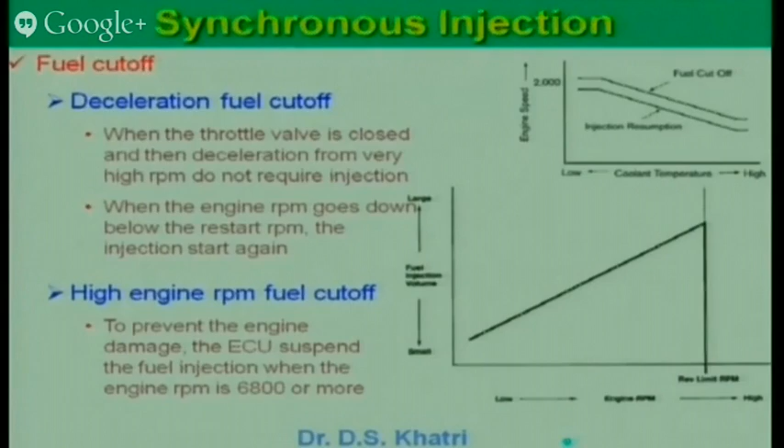Another interesting thing—earlier, when you press the accelerator pedal, the engine speed increases. But I say the engine should not go beyond 6000 RPM, otherwise it is dangerous. So in the ECU we give a provision: if RPM goes above 6000, it will cut off the fuel supply so the engine cannot go higher. If it crosses 6100, it just cuts off and comes back down again. So that protection is there for the engine.